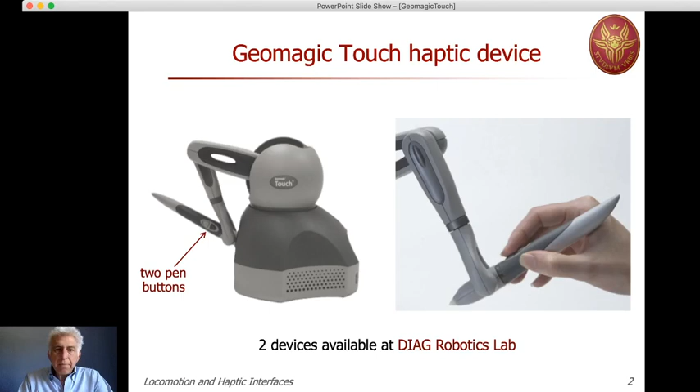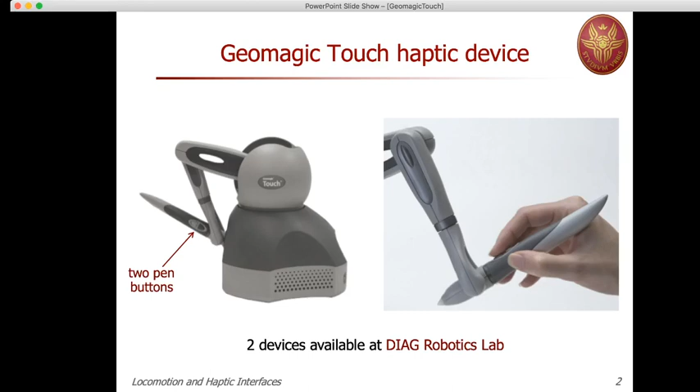We bought one of these devices a few years ago. It was, let's say, 7 or 8 years ago. Then we bought also a second one. The commercial cost of this device in its basic version is around 5,000 euros.

Now, the story of this device is kind of complex because now we call it Geomagic Touch, but in fact it used to be the Phantom device by Omni, which was produced by SensAble Technologies. You see on the left side more clearly the brand name of the same device. This has been acquired in 2012 actually by 3D Systems, and now you can find on the market both devices with different colors, different aspects in fact, but in fact they are the same, the one and only device.

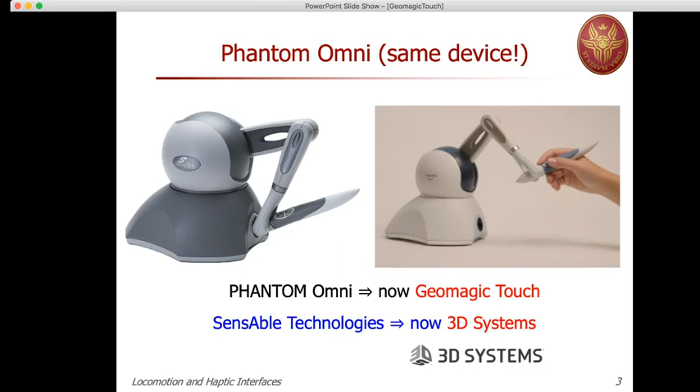So there are a number of degrees of freedom, and we have also this articulated structure that can rotate around the first axis, can elevate the shoulder, can go up and down with the elbow, and these first three joints are in fact actuated. So there are motors that can move this joint. But in fact, the motion of this joint, as we already said, is not really interesting because it's the human user, the operator, that will move the entire structure.

At the end of the second link outside, so it would be the third link in a Denavit-Hartenberg notation, there is a point which is called the haptic interface point, which is very important because we will map this point into some virtual agent in a virtual environment or a physical point in a remote real environment. The size of the structure is clear from the bottom picture: there are 13 centimeters of height, 13 centimeters of length for the first link, and then 13 centimeters for the second link.

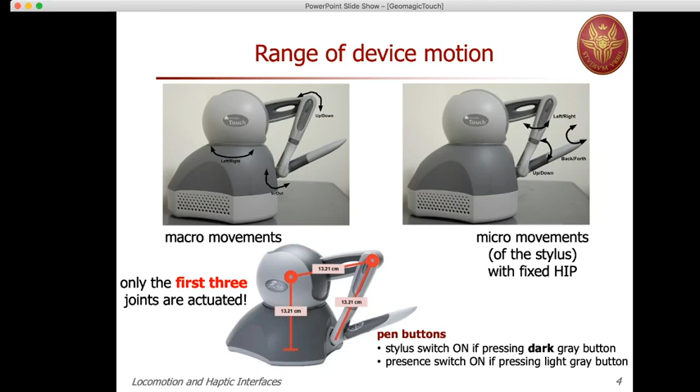On the pen there are two pen buttons, and if you press one or the other, or both of them, you can implement different features. There are 3 more degrees of freedom in the pen. In fact, at the end of the second link, where the hip point is placed, this is also the center of a spherical wrist. This is more clear in this second image.

Again, this is a different color, but it's exactly the same device. As we said, the first 3 joints are actuated, so the motors are inside the base, and there's a transmission in the structure, while the last 3 joints are passive, joint 4, joint 5, and joint 6. One joint is a rotation around the second link, then there's a second rotation around the hip point, and finally a rotation of the pen in the direction pointing to the hip. So in fact, the last 3 joints at the hip constitute a spherical wrist, and they are fully passive, as we mentioned.

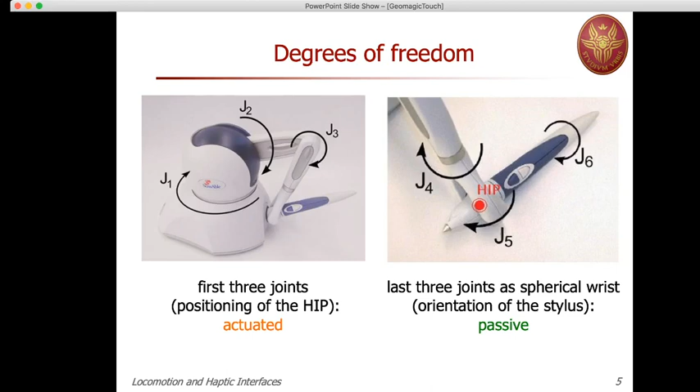This is the data sheet of this device. It is important; a few numbers are more important than the others. First of all, 160 by 120 by 70 millimeters, so it's a parallelepiped, where the device is rated to provide force feedback to the user, so to the hand of the user that is holding the pen. The weight is also important, about 1.42 kilograms, so relatively large.

It's to be specified that this haptic interface is able to provide only force feedback, so force in the 3 Cartesian directions, x, y, z. And this is possible only if you are restricted in the force feedback workspace area. Despite this, as we have seen, there are 6 degrees of freedom; the last 3 are passive.

More important are the numbers contained in the red boxes. The maximum force that can be exerted in a special configuration is 3.3 Newton, so let's say about 0.3 kilograms of weight in different directions.

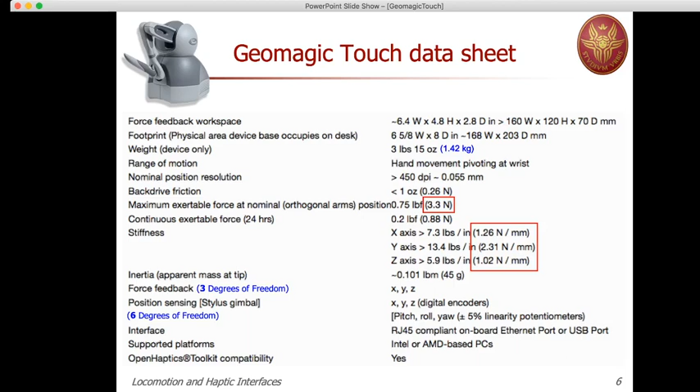This device can be interfaced through an Ethernet port or USB port, and of course it comes together with software, basically the OpenHaptics toolkit, which we will describe later in more detail. So let's see this device in action.

This is a video taken from YouTube, and you can see it used as a haptic interface. You can have a library of objects, move them around in the workspace, and by taking virtual tools with buttons and with the mouse or keyboard, you can carve objects. This user has started with a cylindrical object and is now using this tool to eliminate some material.

And of course you can assemble, disassemble, combine, and do a long list of actions on this virtual object. You can change the point of view and so on.

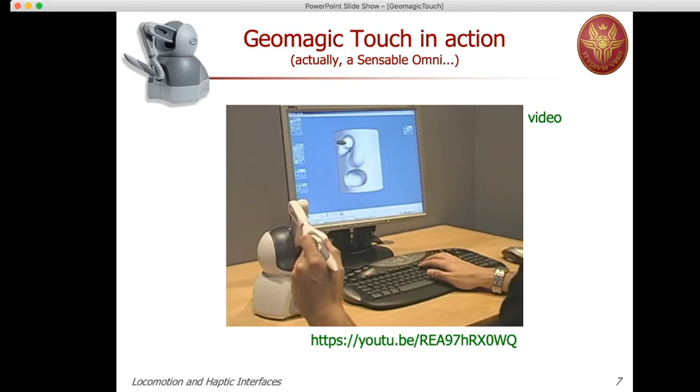All this is part of the software that comes together with any of the haptic interfaces of Geomagic, not only the Touch X. You just have to specify which device you are using at the lowest level, and most of the routines remain the same. For interfaces with 6-dimensional force feedback, both force and torques, there are more features available.

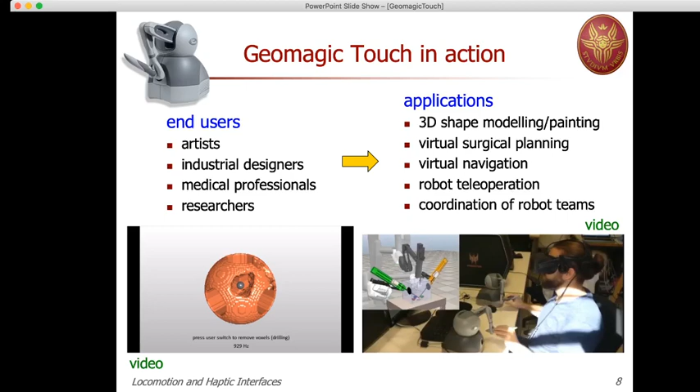So the human operator moves the device, the configuration is being sensed by the sensor for both joint level and then Cartesian position of the HIP. Through the forward kinematic, we map the HIP point, or whatever virtual tool associated to the device, in a virtual environment.

In this environment, we may have collisions, so contact, and we have a model for generating force. There are many models for generating forces. This force is transferred to torques at the level through the same Jacobian which appears in the forward kinematics of the haptic interface.

These torques are being amplified and become current for the motors, and this is the feedback that you feel on the handle by the user. Of course, three-dimensional in case of the Geomagic Touch, six-dimensional for other more complex and more expensive haptic interfaces.

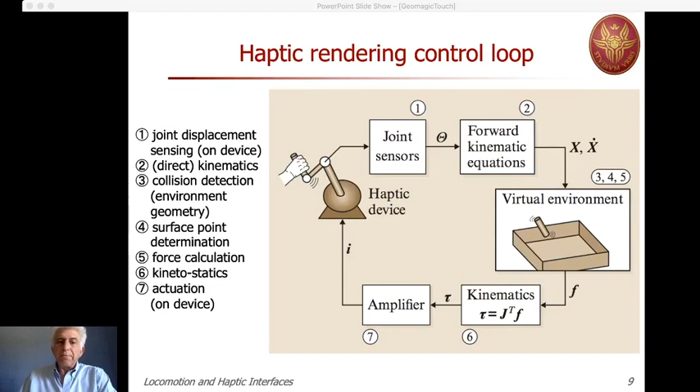So the generation of feedback is made by a geometric model. Again, the most simple case is that you have a force generated by a simple spring, or a spring and a damper.

So while moving your HIP inside some virtual object, you compute the closest point, so between the real avatar position, which is inside a virtual wall or a sphere like in the top figure. You compute this distance to the ideal avatar, which stands on the surface of the object, and this deformation is multiplied by a stiffness constant, which you model for the spring, and you have a reaction force in the direction from the real avatar position to the ideal avatar position on the surface.

Of course, if the surface is smooth, finding the ideal avatar position on the virtual surface is relatively easy. If you have discontinuity of tangent, like on a cube, when you're close to a vertex, you will have some uncertainty on that, so some discontinuity in force generation. This has to be filtered in order to give, or not, this feeling of discontinuity to the user.

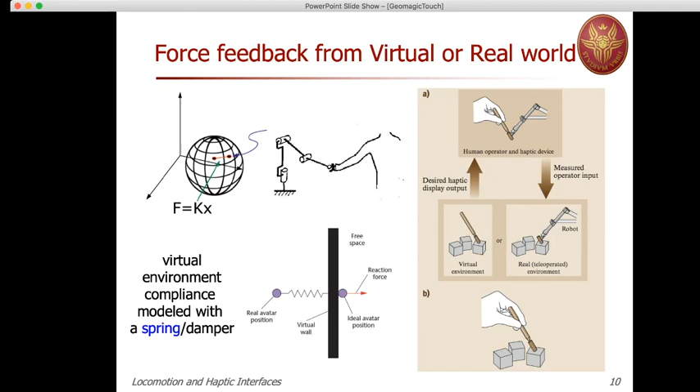Now, there are many sources of forces. For instance, there are friction forces. So when we are in contact, or in a special area of the virtual environment, we can feel a force while moving in contact. There could be static or dynamic friction forces.

For instance, suppose that we are applying a normal force to an object, and we would like to move according to a tangential force. Now, if this tangential force is smaller than the static force, we cannot really move, so we are in a stick situation. And this static force is proportional to the normal force that we are applying.

So the more we apply force along the normal, the higher is this force. And if the tangential force that we would like to apply does not overcome the static force, there will be no motion. As soon as this is being overcome, still proportional to the normal force, we have a dynamic friction force which opposes motion with a dynamic coefficient equal to mu d. And typically, if the static friction coefficient mu s is larger than the dynamic friction coefficient mu d, we may have what is called a stick-slip phenomenon.

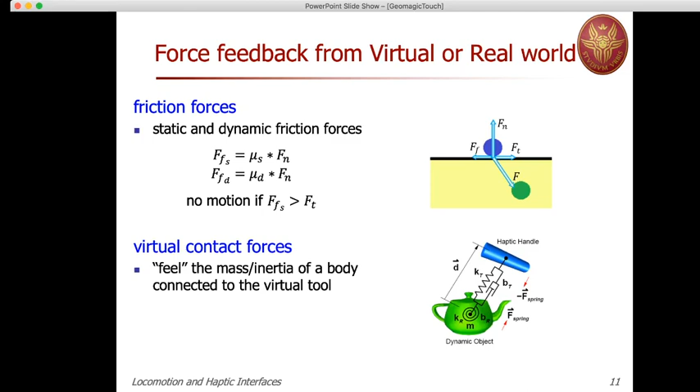In the real world, if the end effector of a robot grasps an object, if we have an end effector force sensor mounted on the wrist, we can feel this force and let this force being felt at the distance by the user.

As I said, this force effect either arises from motion, because we are moving in contact in some area of the virtual space, and could be friction of various types. We mentioned already the stick-slip effect. We can also induce a vibration, for instance if we're getting closer to an area, or getting in contact, or if the virtual object is feeling the force, we can render this force through a vibration effect on the haptic interface.

There are other forces which arise because of the presence of what are called virtual fixtures - geometric shapes used to guide the motion of the virtual avatar representing the HIP point in the virtual space. This is particularly important in surgical robotic applications, both virtual and real, because virtual fixtures help the surgeon stay on the path or in the region, or approach a point in a stable and vibrationless way.

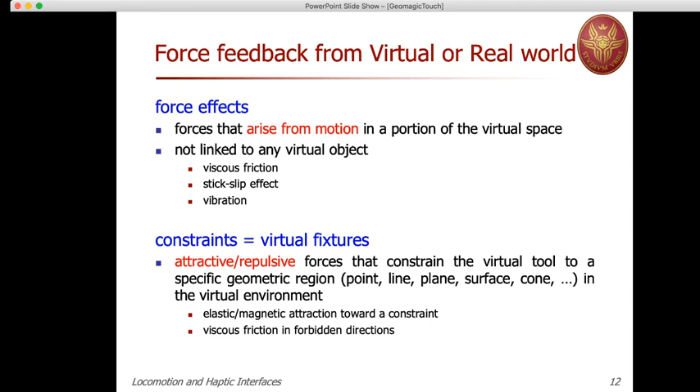So more in detail, how do we generate these signals? This is taken from a lecture by Allison Okamura, this slide. If we have at some point a generated desired force, we have some levels because we have digital data. We convert this digital data into an analog signal, so we have volts through which we drive an amplifier, which brings these small signals to a level capable of generating motion with the actuators.

And the actuator, through the transmission, reduction, and kinematics of the haptic device, turns out to produce an endpoint force - for instance in our case a 3D force, in some other cases also a 3D torque - applied to the endpoint of the haptic interface, so to the human operator.

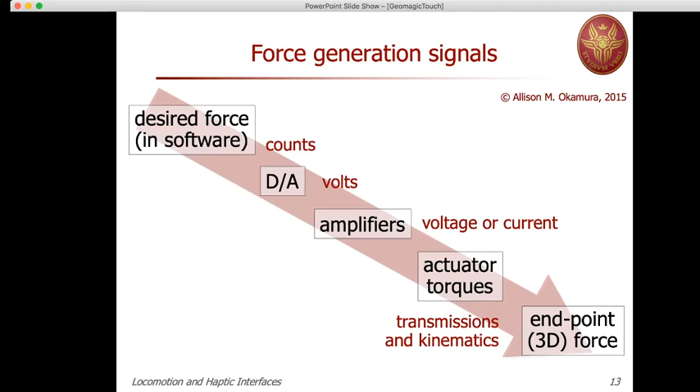This is only part of the rendering, because side by side with the haptic rendering we have learned there is also visual rendering. The haptic device has bidirectional effect: the human operator sends velocity, position, or force commands through to the simulation engine, if we're talking about a virtual environment, and the haptic rendering in this simulation engine returns forces to the human operator.

From the simulation engine, for instance in the reconstruction of ancient Pompeii in the Cyberwalk project, we also have the possibility of visual rendering, different points of view, while we move our eyes or head if we have a head-mounted display, and this produces video on our visual device. And of course you can also include audio if you wish.

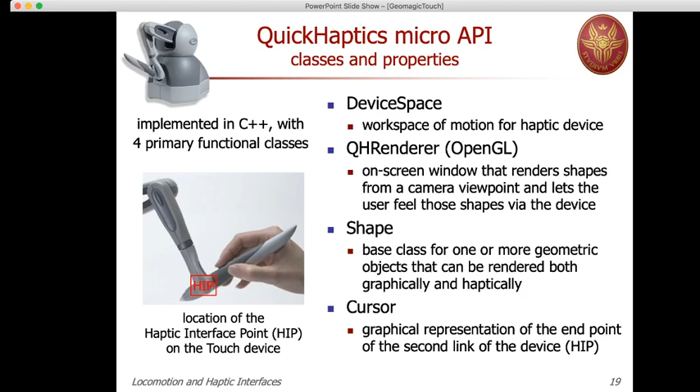Okay, so if you go down in the pyramid of the software organization, the next layer is the haptic library interface. So you can create scenes using the OpenGL formalism. Again, you can define callbacks for handling events, so collision, or also assembly or disassembly of objects. This is the level where you define constraints with virtual fixtures, and of course this virtual fixture will use the type of force generation that we have seen in the QuickHaptics class.

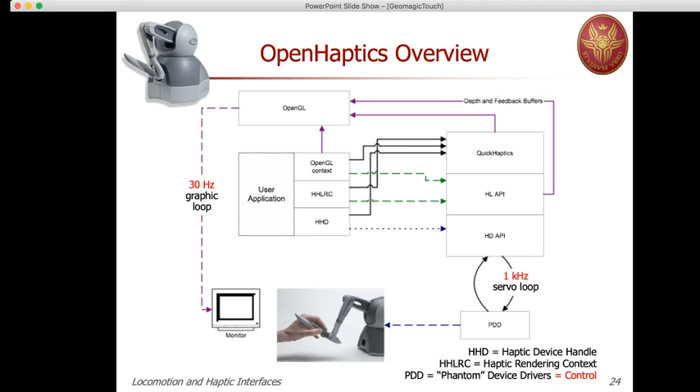The low-level routines, curiously, are called PDD, where the first P stands for phantom device driver, so here is where the control occurs. The fact that the phantom name is used while the device is now called Geomagic Touch tells us the story of the evolution of these interfaces. So something has remained buried in the code, like the name phantom.

So when you set up the system, first you have to pair the device. You may have multiple devices; in fact, you may have also 2 devices, and pairing occurs by connecting the system to your main PC through an Ethernet cable, or a USB cable, or through a conversion. Once you have done this, there will be a pairing through IP address between the CPU and the device itself.

You have to run a calibration operation which calibrates the sensor, and you do this while the stylus is inserted in the inkwell. If you imagine that this is a pen, in fact it's not a pen, but the terminology is being used the same. So you calibrate the device before starting, in much the same way as you calibrate or bring a robot to its home position at start when it has incremental encoders. Okay, so this is the same idea.

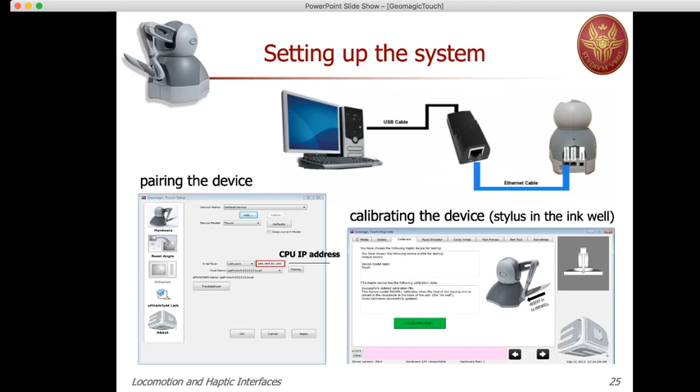I would start now with an application that you can have. This is very interesting, developed by the group of Professor Prattichizzo in Siena. Here I'm referencing a paper from 10 years ago. What was their idea? Before doing whatever application, you have the desire of transparency, the fact that whatever you do, you don't feel any bias in what you're doing. So here on the left you see an Omega 6-dimensional device. This is not the Geomagic, but the same can be done in principle for the Geomagic as well.

These devices are very light. You see in this case there's a parallel kinematic. This device has 6 degrees of freedom, but here is being used only in position. They are light, but if you leave the device by itself, it falls under gravity. So when you're holding the ball, which is the effector of your haptic interface in this case, or when you're holding the pen in the case of the Geomagic, although light, you will feel some gravity. So if you want to move and apply a force in a certain direction, the actual force that you feel, or the force applied by the device to your hand, includes in this total force, Fh, also the gravity, the own mass of the device.

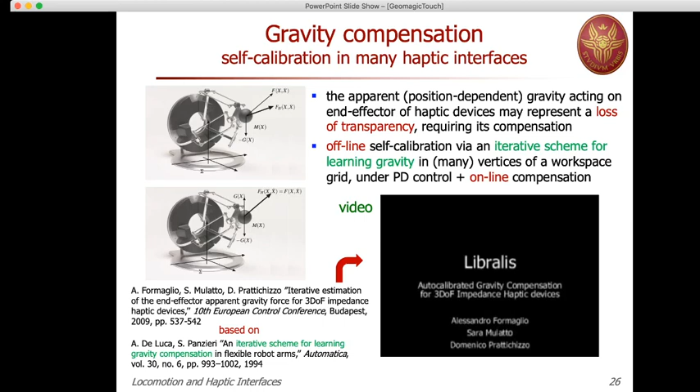So this was work performed by the group of Domenico Prattichizzo, very active in the haptic world and in robotics as well.

Let's move to a very important aspect, one which matters especially if you would like to develop an application interfacing with a simulator, a robot simulator.

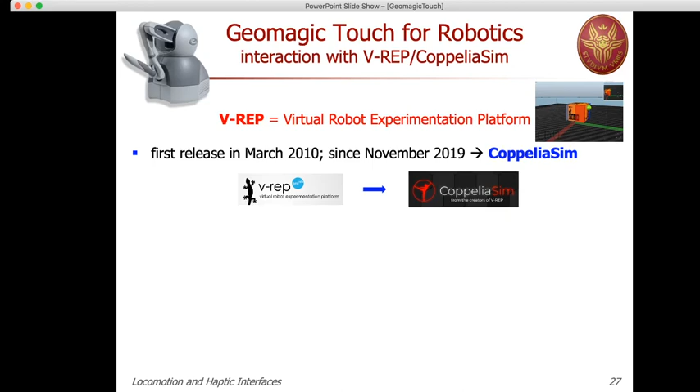So this is a main use of the Geomagic for robotics. Our preferred tool is VREP.

VREP was developed in 2010, the first release. Very recently it has changed name, now it has become CoppeliaSim. In fact, VREP itself was developed by Coppelia Robotics, and now has become the main product of this company, so they decided to change the name of the software to include the name of the company—Coppelia Sim since 2019. Nothing has essentially changed.

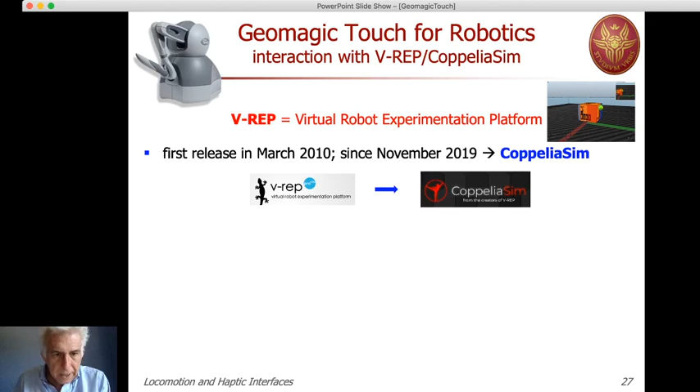There's a freeware version for educational use, which has some limitations, but no major limitation for our purposes, so you can really use Coppelia Sim as you were using VREP before.

So what does VREP do? It's a very versatile simulator. You can program robot motion and also program controllers. You can work at the kinematic level or at the dynamic level.

Most of the time we use VREP as a kinematic animation of what's going on, unless we have to handle collisions, exactly in the same way as the toolkit provided by Geomagic.

The haptic APIs allow you to handle collision in the virtual world generated inside it.

Now we would like to be interfaced with this environment. Why? Because in this environment we have a number of predefined robots, or we can generate new robots in VREP, so it's very friendly from the robotics side point of view.

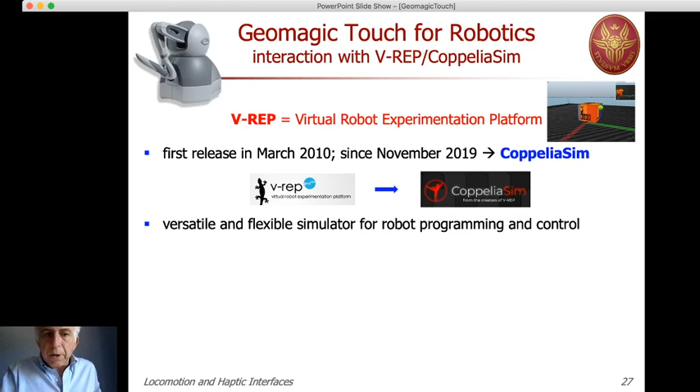VREP itself has a number of control entities, plug-ins in C++, and it can use ROS nodes programmed in C++ or Python. It has applications that connect to other clients like MATLAB, so we can run a simulation in MATLAB and have only the rendering in VREP, and so on.

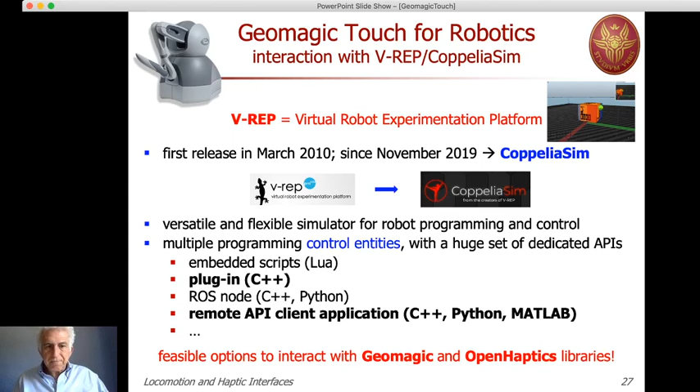Now, all this makes it feasible to interact with Geomagic as an input device and also an output device for rendering forces, and of course with the whole set of OpenHaptics libraries. So it's convenient to have this interaction. So how do you interact with this?

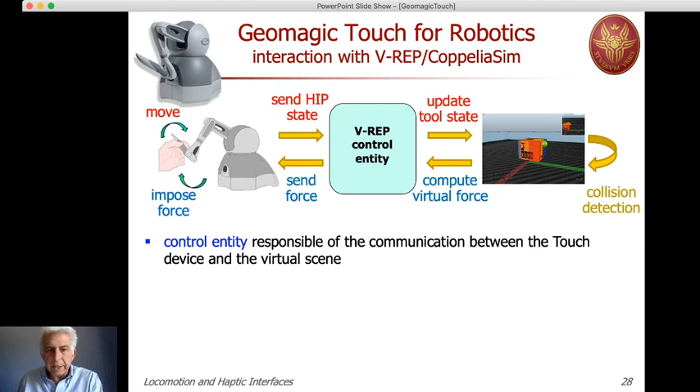Of course, you may have also visualization in VREP, so you have also a graphic rendering, and you have to synchronize this, and this is a matter both of the Geomagic Touch side and of the VREP side at the same time. So the control entity in VREP should be responsible for the communication between the touch device and the virtual scene, and communication includes also coordination in one direction and in the other direction.

You have to couple, of course, the HIP, the interface, the haptic interface point on the device with a virtual object in the scene, and this pairing can be changed, so this couple needs not to be permanent in a given application. In this case, it's the green point which has been paired or coupled.

And as I said, when computing the feedback force, you can use the VREP collision detection module, which is built in, or you can define your own routines in order to generate the virtual force. This is very convenient indeed.

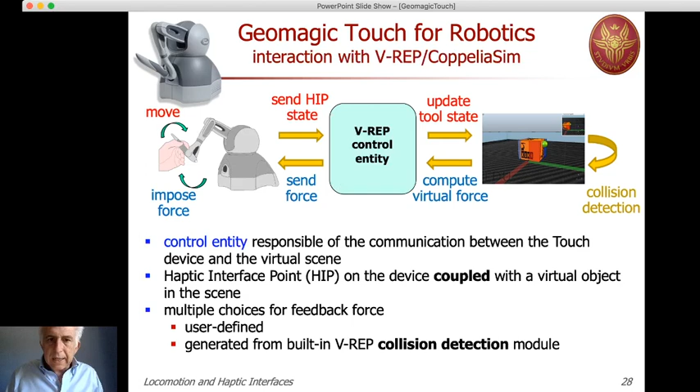So the VREP control entity, which is something that you should program, in fact already exists. There is a so-called, I don't know how to pronounce it, Chai 3D, so it's Computer Haptics and Active Interface in 3D, which is a VREP plugin that handles all the communication, interfaces, and exchange of data. So Chai is again multi-platform, so it's not only for VREP, but it has a VREP plugin. It's a multi-platform library of C++, both for visualization and for haptic interface.

In this sense, it can wrap around the OpenHaptics library, so it's a software level that allows you to communicate without extra effort with all the classes and programs and C++ routines of the OpenHaptics libraries in a seamless way.

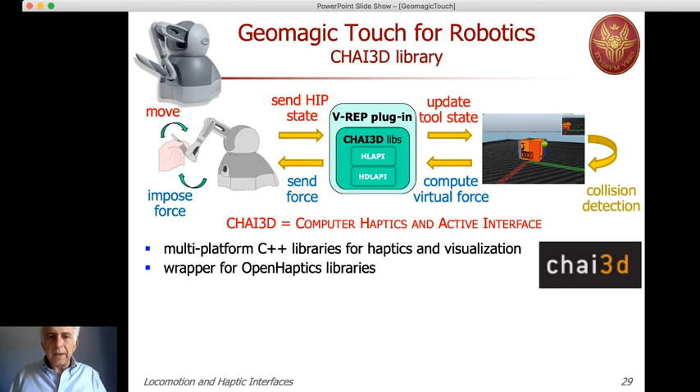So you see that inside the Chai 3D libraries there are also the haptic library APIs of OpenHaptics, and also the haptic device API. There's an extra L here which should not be there. So it handles, because it's not only haptic, it's also graphics, so it manages graphics based on the standard OpenGL.

And it allows getting data from the device and setting values, for instance, of current for the motor values in an easy way. And as I said, all these properties are integrated in a module which is designed for VREP, and it's a plugin for VREP. It's again a C++ plugin.

So very good, so this helps a lot. If you work with Chai 3D, you can use all the features of this. There's a limitation. Apparently this has not been maintained, and the latest VREP version, in particular the latest CoppeliaSim version, when the system changed name, are no longer compatible with some or all of this activity.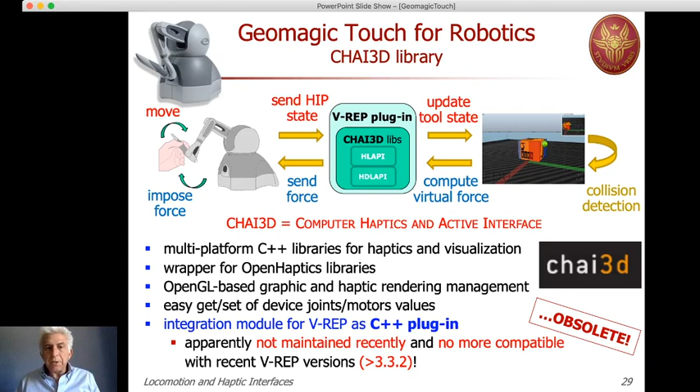So in a sense this is obsolete and needs to be revised. Either Chai 3D will revise itself with the latest CoppeliaSim version, or you have to do your own VREP plugin by yourself. But before being obsolete, we have developed a number of applications using this.

For instance, this was one LHI project, a short project, probably made in collaboration with MedRob, the Medical Robotics course. At the end of this slide you will find a full reference to this student project, so if you're interested I can provide you some of this.

So here they developed a simulation environment in V-REP intended for a task which is important in medical robotics, which is needle insertion. Not only the needle insertion, which is a pure motion problem with many specialties, but also rendering the force that this needle exerts on tissues while entering some biological body or human body.

These forces need to be sensed and rendered to the user, who is moving the VREP robot, in this case the KUKA LWR4, through the Geomagic interface. So it is synchronizing the simulation loop in V-REP and the haptic library of Geomagic, and of course also the low-level device interface.

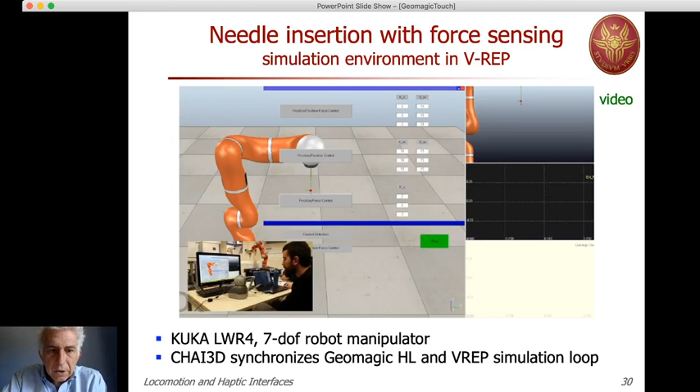Okay, so let's see the video here, and you will see now a picture in picture showing the interface. The real robot is beyond, but at this stage in this short project there was only a simulation environment developed. So you see that you can move around the robot. The robot has a different kinematics than the Geomagic Touch interface, so you have to map this into motion of the end effector.

Now you see on the right side that the tip of the needle is entering a first layer of an object, and you see that signals are growing, and in particular there's a large force signal growing until there's a change of material, so you have a sudden drop of the estimated force.

And then again, entering inside the object, you will see various peaks of the estimated force, and these peaks correspond to a change of material. The material is covered by skin, and when you have to enter into the skin, you have to apply a larger force than when you're navigating inside one of these layers. So each layer has a skin, and forcing the break of the skin allows you to enter the next layer. And this is what you see.

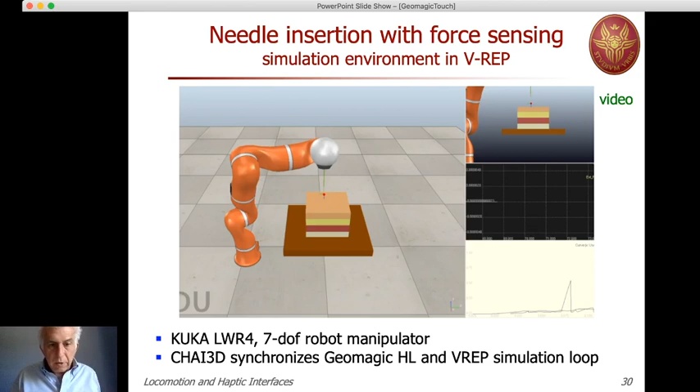Playing with buttons—this is the right place to say this. You see on the top right figure, there is now a 3D system device. The logo has changed, where the pen has been dismounted. You see the plug-in, the high fidelity plug where you can put the pen. Here below I have an expanded view of the pen where you can recognize the dark gray and light gray buttons that can be pressed by the user while holding the pen.

So, playing with buttons—why is that? Because the master and the slave in general, in particular for the KUKA, have different workspace sizes. If I want to move the end effector of the robot by, let's say, 50 centimeters, of course the KUKA can do this, both in reality and in the virtual world, but 50 centimeters is way too long a distance to remain inside the workspace of the device.

Not only that, there are some configurations of the device where it cannot return high fidelity forces. We have seen this in the force workspace defined by the device itself. So although you can extend the device beyond this parallelepiped, at that level the fidelity in rendering the force is no longer good. So, in order to extend the Geomagic's limited workspace and to match it with the workspace of a real or virtual robot, a clutching mechanism is required.

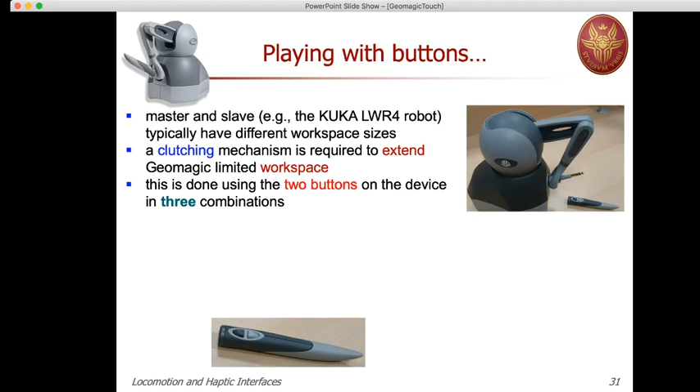There's a fourth mode where you don't press the button and you are completely clutched. So you're moving exactly the tip according to how you're moving the tip of the robot, or the tip of the needle in this application, according to how you move the hip of the Geomagic Touch.

However, if you press the first button, then you completely release the clutch. So the slave position and orientation is modified. Well, this is a negated logic. So if you release the clutch, you don't press this button, or vice versa - I don't remember exactly the detail here.

But say with the bottom one, you modify both position and orientation of the slave, in our case the tip of the needle mounted on the end effector of the KUKA lightweight robot. Button 2 allows you to distinguish between position and orientation, so orientation continues to be modified, but the position is no longer modified. Okay, if you press button 2.

Pressing both buttons together, it's like simulating a fixture. In this case, you move only along the position, only along the z-axis, the approach direction of the slave end effector, while the orientation is not changed. So this is complementary to button 2.

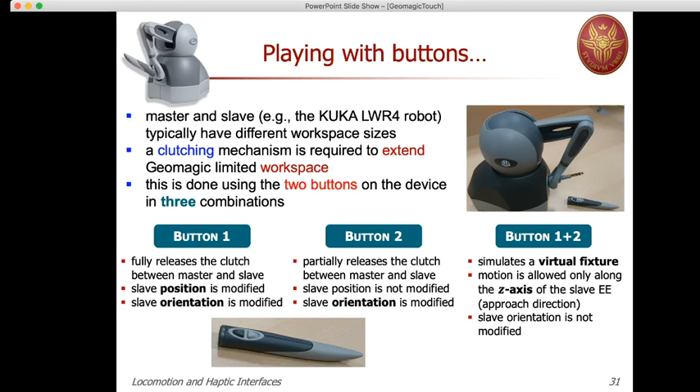Of the Geomagic Touch. Okay, now let's go back to the fact that the CHAI3D system is becoming obsolete as far as we know. So the idea is to develop a more general solution - some interface which connects the haptic device both with the virtual world as well as with the real world.

So this general solution should really work for both the virtual and the real world. So the control entity that you have to design again works as a wrapper, including both the APIs of the OpenHaptics libraries in order to communicate with the Geomagic Touch, receiving for instance the hip state and sending the force that needs to be rendered on the device.

But it wraps also the VREP remote client, so associating a scene, a tool in the scene, and all the interaction from this - so updating the state of the tool and computing the force in case of contacts - but also may wrap one or more external system proxies to interact, for instance, with the KUKA lightweight, or with the universal UR10 robots, or with whatever other system that you have in mind.

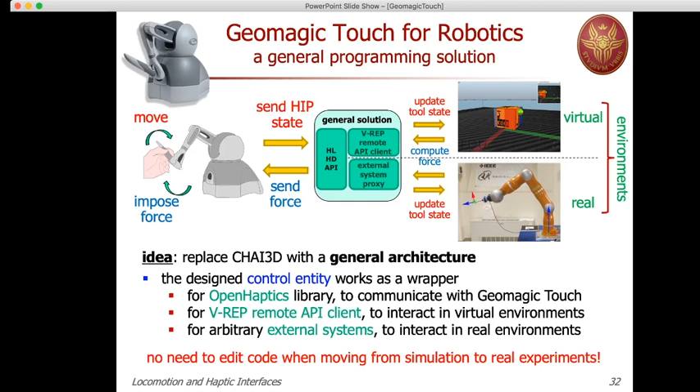So this is a very interesting environment that is being developed in the lab. So if you will eventually work with these devices and robot devices, or VREP and the Geomagic Touch on the other side, this is the framework in which you will operate.

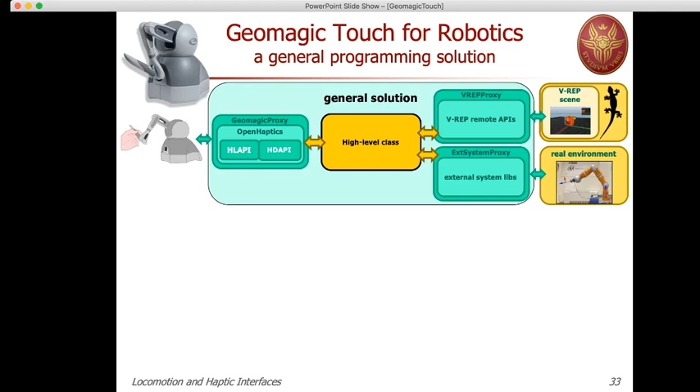So in particular, this general solution is made in this way: you have a Geomagic proxy which queries the OpenHaptics libraries and the toolkit, for instance, to update the hip state both in position and orientation, and velocity computed by numerical differentiation typically.

And this is in one direction. In the other direction, you need to impose current to the motors, so you need to render the force on the device, and all information being transferred is sent to the high-level classes, which is your specific application-dependent code that processes this basic data.

The high-level class, of course, interacts either on one side with the Geomagic proxy, on the other side with the VREP proxy, so as to have an update of the scene, and of course again set and get values for the virtual object in the scene, or from the virtual object in the scene, to be transferred then into forces to the Geomagic proxy class.

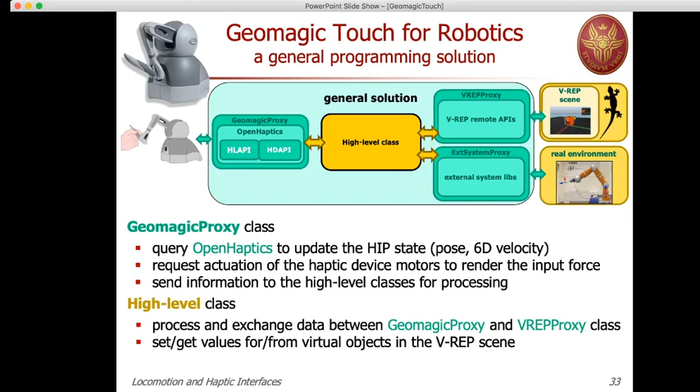Just to have an idea of what is inside, there are all C++ wrapping environments, so HPP or CPP code that exist as elementary pieces of programs, something that should be developed further. On the right hand side you see a callback call, so you're passing code to another program, and this other program will run the code when needed, in an asynchronous mode.

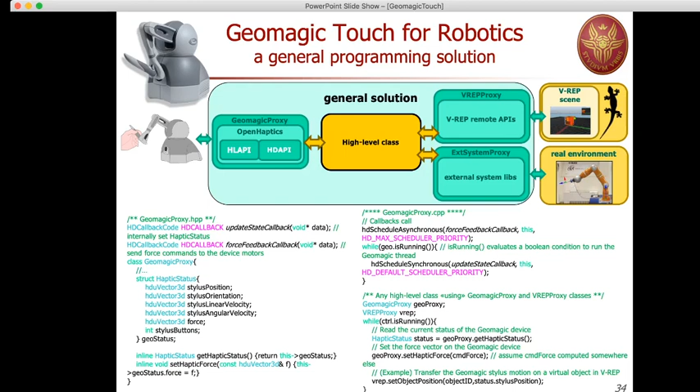So let's move to more videos from now on. I would like to show what has been developed with the Geomagic and the actual KUKA. This may or may not be the previous system, the CHAI3D system, or the new programming environment. This makes little difference, but just to have an idea of what can be done in terms of application.

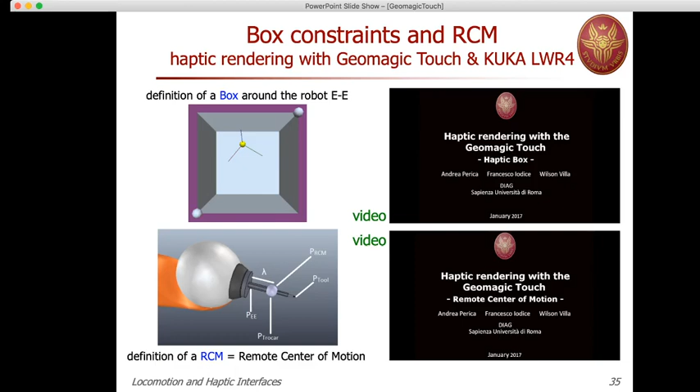So the first application is the creation of a virtual box, a haptic box around the end effector of the robot. Here you will see moving the end effector of the robot with the Geomagic Touch, going in any direction, not changing the orientation. And now we create a box. Pay attention to the motion of the tip of the robot and also to the tip point of the device. You will see that the device will feel a force and stop suddenly at the corner or side of the virtual box.

So there are two things to understand in this video. In one sense, the command of motion, only position in this case, and this motion is stopped when you reach the limit of the box. At the same time, you feel on the haptic device this force which prevents you from going outside with the tip from the pre-specified box constraint.

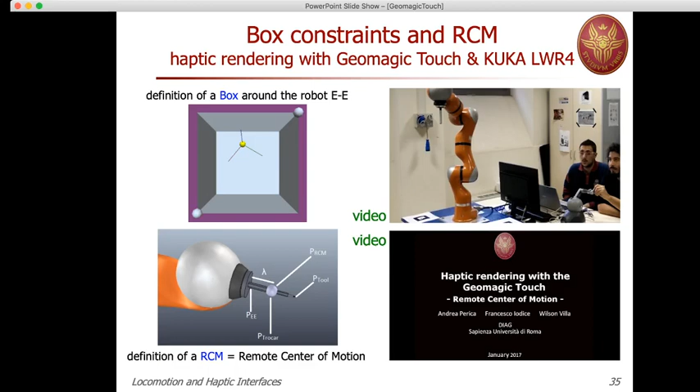More sophisticated is the definition of a remote center of motion. This is very important for minimally invasive surgery, where a tool should enter the surface of a human body at a certain point, and this point remains constrained. So the tool inside may still move, but the entrance point constrains the geometry of motion. This is called the remote center of motion, and you should program this as you progress, for instance, in the insertion of a tool inside the body. You should prescribe that a specific remote center of motion changes its position on the tool but remains constant in the virtual or real world.

So here we'll see motion of the tool without remote center of motion, assuming that remote center of motion is exactly the tip. Now you're moving in position the tip without changing orientation, or by pressing a button you're changing the orientation without moving the position. So this is the typical situation where the remote center of motion is in fact the tool tip.

When you're imposing a different point along the tool, in this case this last aluminium link mounted on the end effector, you see that now you go inside, and now the rotation is close to the tip but not exactly at the tip. You go a little more inside, and now you assign motion in orientation, and you see that you rotate around another point, which is the remote center of motion.

And again, you can go even farther. You proceed like this, and now the remote center of motion is in fact very close to the base of the tool, and then you can go back. I think this visually explains very clearly what this is. Of course, you have to define this virtual constraint, a virtual fixture, and this is a user code which then interfaces on one side with the haptic device, on the other side with the real robot.

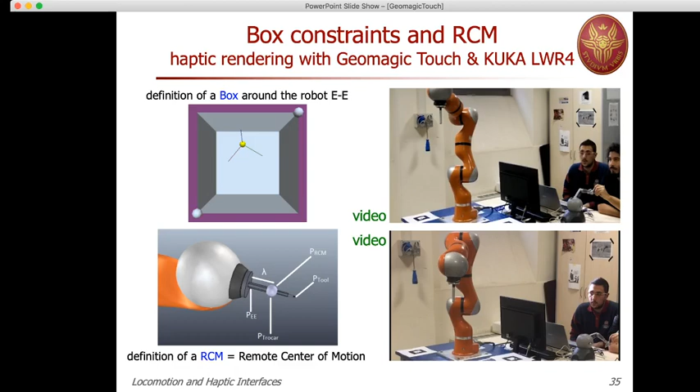So what else could be studied? Well, as such, you can really develop the Denavit-Hartenberg parameters, forward and inverse kinematics for your device. Of course, this is inside the system, but you can reproduce this also in your user code, and accordingly the Jacobian matrix, the singularity, the design of PD and PID control, trajectory planning, and various haptic rendering forces, and so on. So you can reproduce externally, let's say in a Simulink MATLAB environment, all this concept.

If you're too lazy for doing this, you may know that Quanser, a brand that produces academic systems like double inverted pendulum, pole in a cart, and so on, has also generated a bundle for the Omni interface, which is another name for the Geomagic Touch, interfacing it to a Simulink MATLAB environment. Some of this software is accessible, though the part relating to the interface with the device is not freely available. But at least you can look at what has been done, or amplify, reproduce, modify, or generalize it.

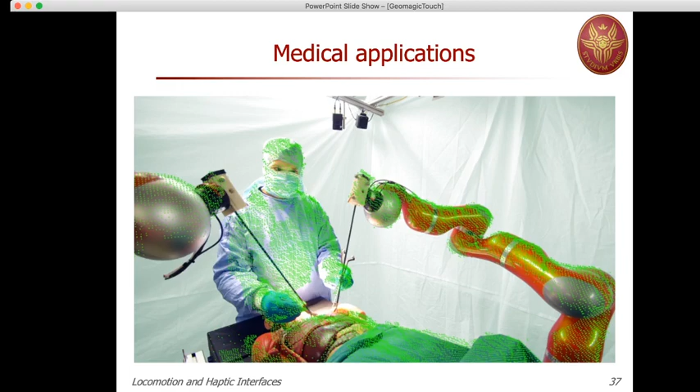Here I will show some results from a student project. This was needle insertion with force feedback. We have seen first the simulation environment we developed. Later on, this teleoperation was done with the Geomagic Touch and the real KUKA arm.

Then experiments were made with different materials, for instance interacting with the tool on polystyrene, which is soft but of rigid shape, or interacting with a layer of biological gels, which give a different sense of feeling in the force reaction. There was a force torque sensor mounted on the end effector of the robot. Beyond the force torque sensor there's a tool plate on which the final tool is mounted, which could be replaced, for instance, by a needle in the medical application.

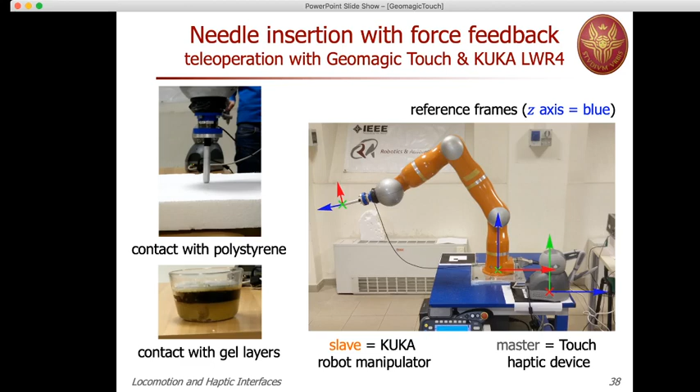So how do you control this? This can be done first in simulation and then on the real robot. The simplest way is this bidirectional teleoperation scheme, in which the master communicates a velocity command to the slave, which is the KUKA. The slave has its own control. In our case, we can use the KUKA controller for generating the force on the slave, and the sensed force from the ATI force torque sensor mounted on the KUKA is fed back to the master.

So there are only two channels in this sense. One channel sends velocity commands, realized by the KUKA controller. In the other direction, force measurements sensed on the slave side, from the interaction with the environment, become part of the master control, so of the force generated on the Geomagic Touch device. The Geomagic Touch device interacts with the human operator, who applies forces, and the relation between forces and velocity is given by impedance models, as we have seen, or vice versa by admittance models. An impedance model transforms a velocity into a force. An admittance model does the vice versa, transforming a force into a velocity.

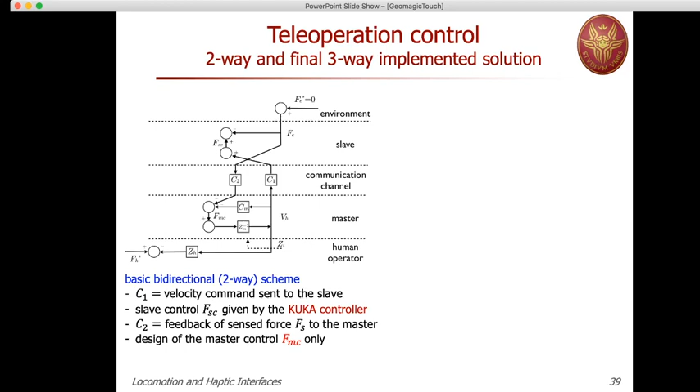So this was the basic scheme, but in fact, to improve transparency, one more signal is being transferred. In particular, the velocity of the slave is also being returned to the master.

The control of the master is proportional to the sensed force by Ks, and in addition proportional to the difference between the master velocity and the slave velocity, of a specific point of the slave, the tip of the tool mounted on the end effector of the Kuka, and the tip velocity and the tip velocity of the master. Pay attention that the master has no direct measure of velocity, like many current robots. Velocity is measured by differentiation of the position sensors on the master.

So Vm comes from measuring the position of the joints and then of the Cartesian point, the tip point, and this is done at the 200 Hertz rate, although the haptic device could also generate data at 1 kilohertz, but we downgrade this in order to be consistent with the 5 millisecond reliable control of the Kuka arm. This velocity command, before being passed to the slave, is being filtered. There's a smoothing part, simply an average of the last 3 samples, and a low pass filtering, so that the slave receives commands that are smoother.

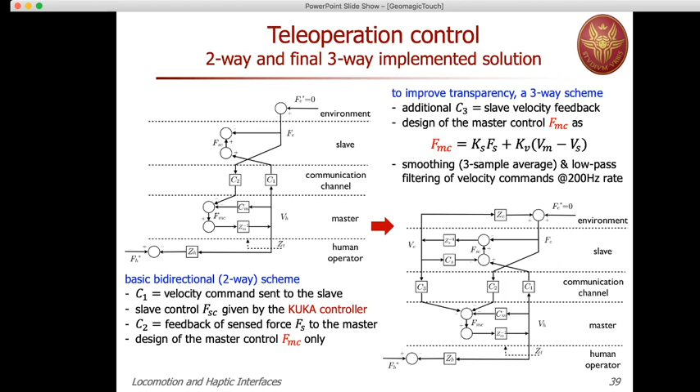And similarly, when coming back to the master command, so the FMC, the force on the master, the control force on the master, the fact that we are using filtered data makes the behavior more smooth. So eventually a 3-way teleoperation control scheme was used.

So here you see the situation where at the end, the final setup, the Kuka mounts a force torque sensor, then a support flange, and on the flange a needle. And the needle is being inserted into a piece of ham. The ham has a thicker skin, and then it becomes softer, as you may know.

So in this sense, a teleoperation is being made. Let's look at the video. There's a stop, the approach phase, then the needle enters in contact and now proceeds by pushing inside. And the force measured is sensed on the haptic device.

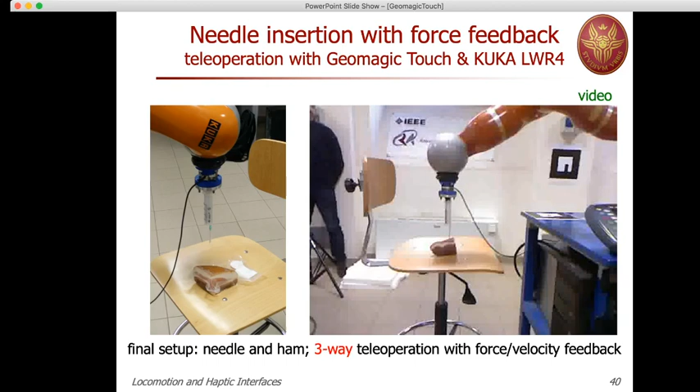And this is in one point, then the robot moves to a next point and inserts, and then goes back and forth. Maybe we could go faster here, so I go back and forth to see the motion. You see how this system operates in real time.

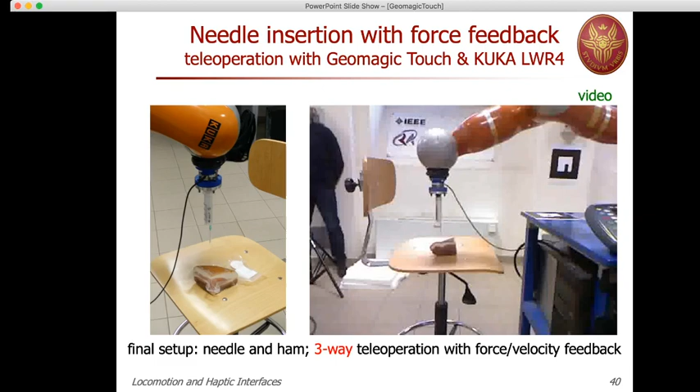So the next step is to move not to a biological tissue like a piece of ham. Here in the lab we are using an abdominal phantom, so still a virtual object, but which has the real characteristics of the central part of the abdomen of a human being, so with ribs, with fat on the surface, muscles, livers, and so on, and also the spine column and a piece of kidney, of the 2 kidneys inside. This pink-like mock-up is being used as a representative of the human body.

So the robot is mounting the needle, and at the same time you see that echography is being made of that mock-up. So we will see on the screen of the echograph the needle advancing, the actual position, driven by a radioscopist, so a medical doctor, using the haptic device, and tracing the reflected force on the device.

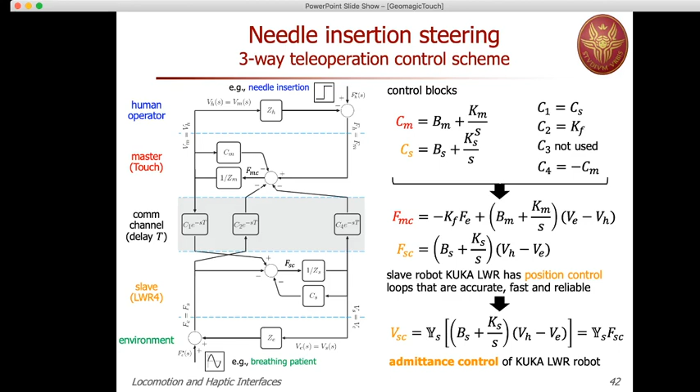This is the difference between a simulated environment and the real environment. This is the overall teleoperation control scheme. I was kind of sketchy, but you can look in detail at this equation to understand the rationale behind it.

And this is the actual result. Here on the left top image you see the echography, and at some point you will see, on the top right part of this image, the entering of the needle. Here you see the needle coming in.

You see almost no motion of the robot because this motion is very slow, it's quasi-static. And you see the estimated forces and the user perception by the medical radiologist that detects the various phases: experiences transition and bone contact on the abdominal phantom.

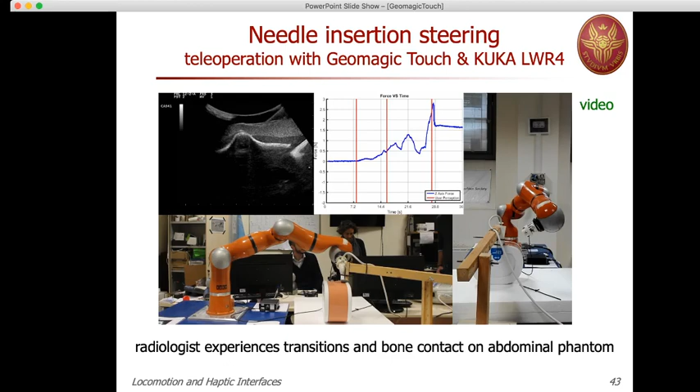Next, this is a project developed by Dr. Marco Ferro with a group at the University of Naples, where they have a Da Vinci research kit, a real Da Vinci system, but it's very convenient to also have a simulator.

In fact it's a portable simulator, so that you can carry with you only the two Geomagic Touch interfaces, a head-mounted display, a screen, and a software code, and this is all you need in order to mimic and move the robot arm of the Da Vinci research kit, the dVRK.

What are the characteristics? The Da Vinci is modeled with its own full kinematics in V-REP, and this is the first image on the left bottom part of this slide.

You have the two Geomagic Touch devices that emulate the master tool manipulators of the real Da Vinci system, the way in which you move the real robot through the master of the Da Vinci. These are emulated by the two low-cost, I would say very low-cost, Geomagic Touch haptic interfaces.

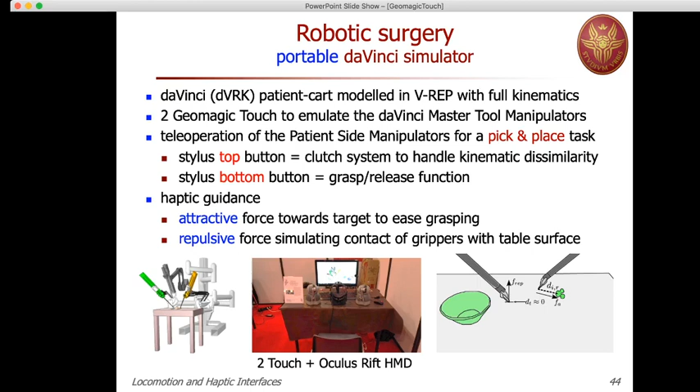And here you will see a short video. This has been developed in full in Sapienza and was presented also at the Maker Faire, both in October 2018 and in October 2019.

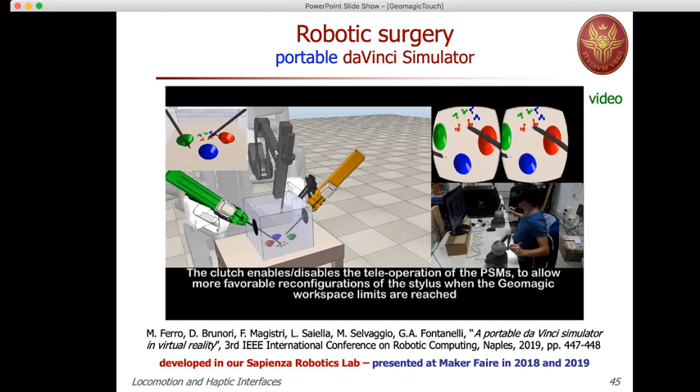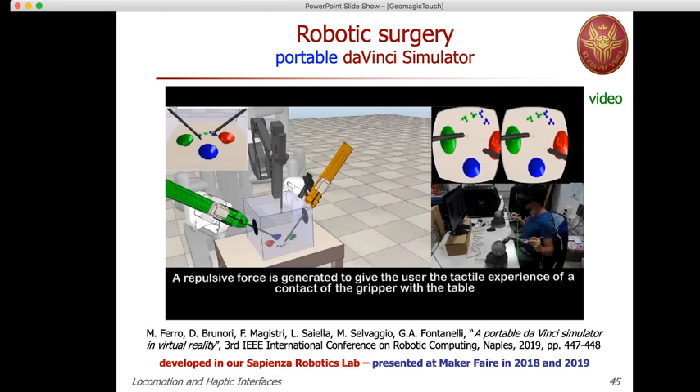Here you see the various phases, the manipulator touching objects, touching the table, and when they touch the table, this is felt on one of the two Geomagic interfaces.

Okay, so this was just a short review. Unfortunately, the best way to experience this would be to use the simulator in the lab. As soon as this will be possible, we will do that.